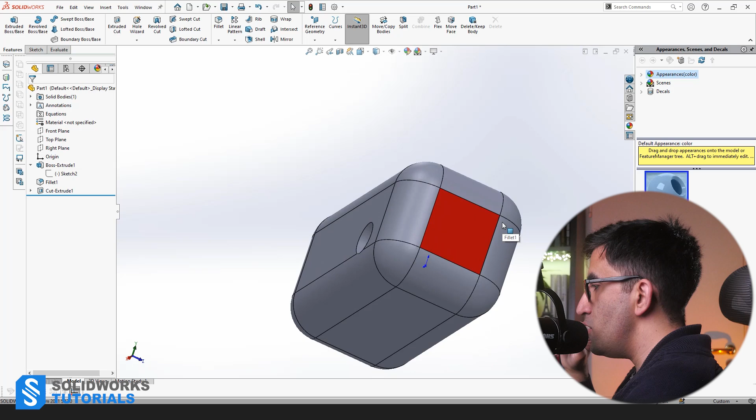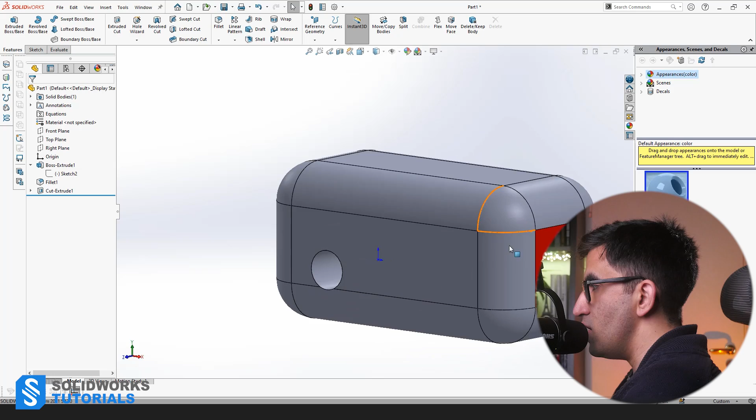All right, so we want to pick it up where we left off. In this video you might notice my navigation is much smoother, because I'm using a 3Dconnexion SpaceMouse Enterprise. I'm trying to get acquainted with this device, understand its pros and cons, so I can make a review later in a different video. Don't worry if your rotation isn't as smooth — you can still work with your regular mouse. This is how I rotate with my normal mouse, and this is how I rotate with my space mouse.

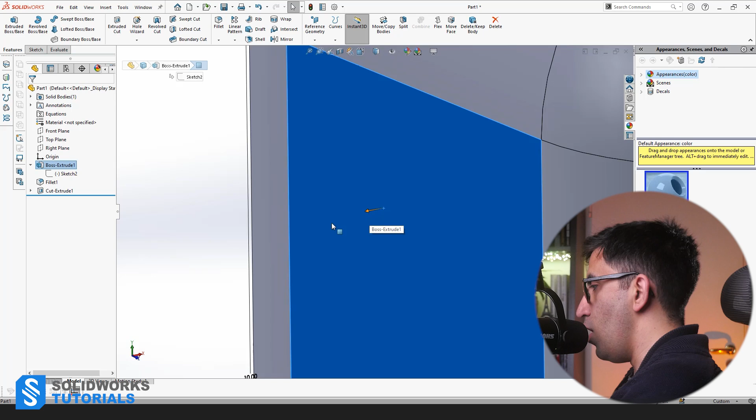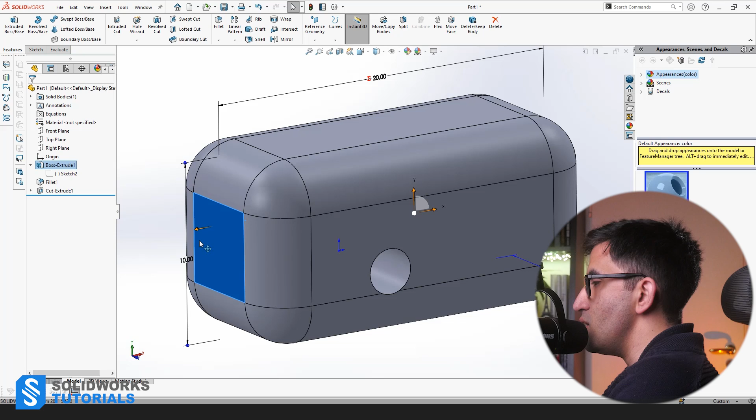Okay, this is what we made last time in episode 2, and I want to make you aware of one very important factor: fully defining your sketch and objects in general. If I select one of these faces, let's say the red one, I'll notice this arrow normal to the surface — it usually pops up as orange in later versions of SolidWorks, though all colors are customizable. If I drag that, you see the cube doesn't change in dimension, it just moves, while the through-all hole stays where it is. If you don't know why that is, there's no point trying to learn more complicated modeling, because this is the ABCs you need to understand to thrive in SolidWorks.

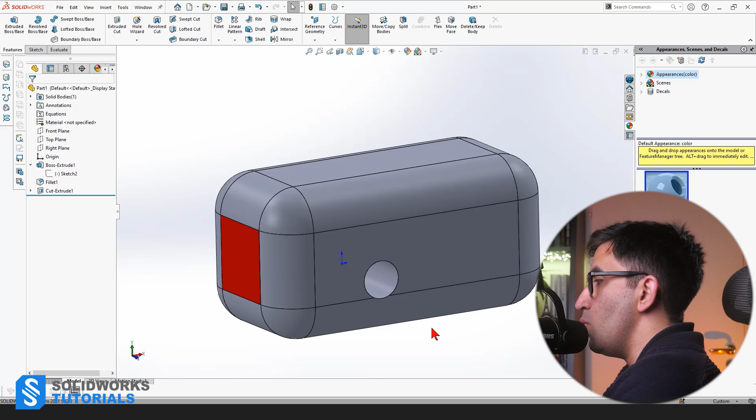All right, let me tell you why. The reason the body of the cube can move but the hole is fixed is because the base sketch used to create the hole is fully defined, while the base sketch used to create the body of the cube is underdefined. Let me show you. I'm going back to the design tree and covering all 3 features used to make this cube with the hole. We have Boss Extrude.

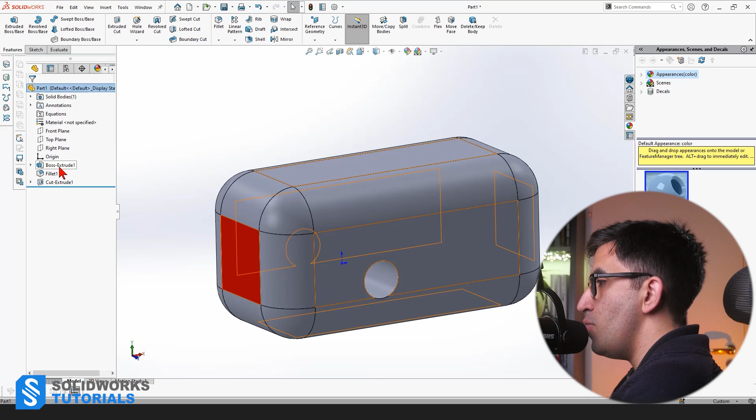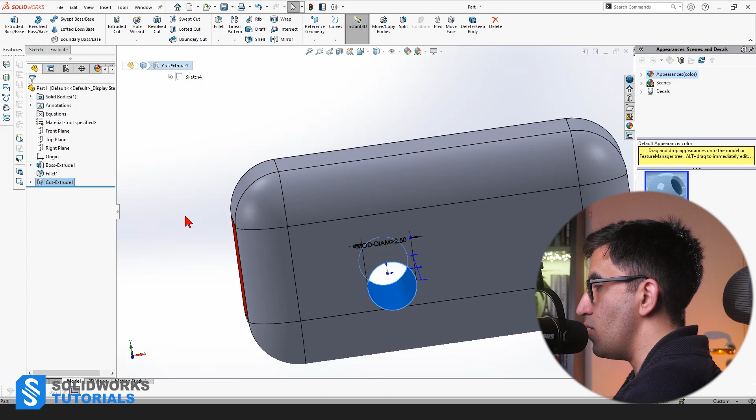I just clicked on it one time and you see this is the body of the cube. We have used Fillet, which has rounded the outer edges of the cube - you see it highlighted in blue. And we have Extruded Cut,

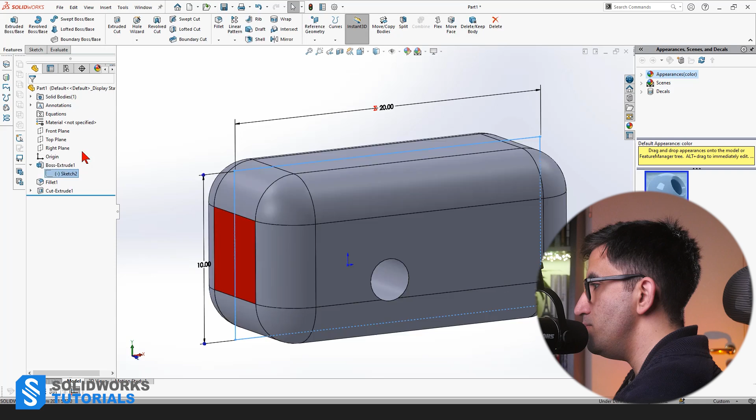which we used to create the through hole in SolidWorks. All right, let's just open the first combo by clicking on this arrow over here, and we see the base sketch we used for the cube, sketch number 2. One click on it, the pop-up menu appears here, and I can select edit sketch from this menu, and it brings me back to the base sketch.

We see that it's 20 by 10. Ignore this equation symbol here, I was just playing around.

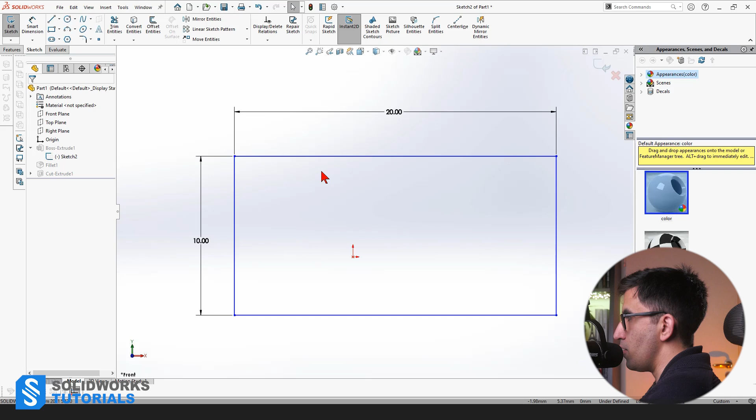All right, so we see the color of our sketch is in blue. Blue is a color-coded definition of an under-defined sketch, which means your sketch is not 100% defined and there are variable solutions to this rectangle. So what dimensions are needed usually to define a rectangle? You need only 2 - one height and one width. A 2D rectangle does not need more than 2 dimensions to be defined.

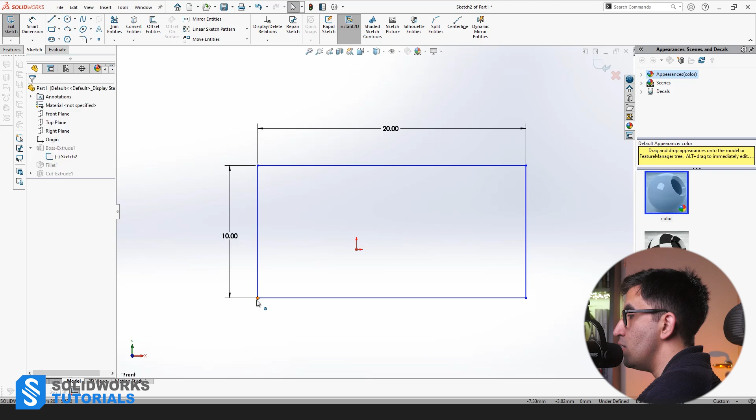However, that only defines the geometry and the size of your rectangle. It does not define its location, the exact coordinates of each corner, right? Because this cube, for all we care, could be 10 by 20, but it could be here, or it could be here. That's why it is still in blue, and that's why it's not fully defined.

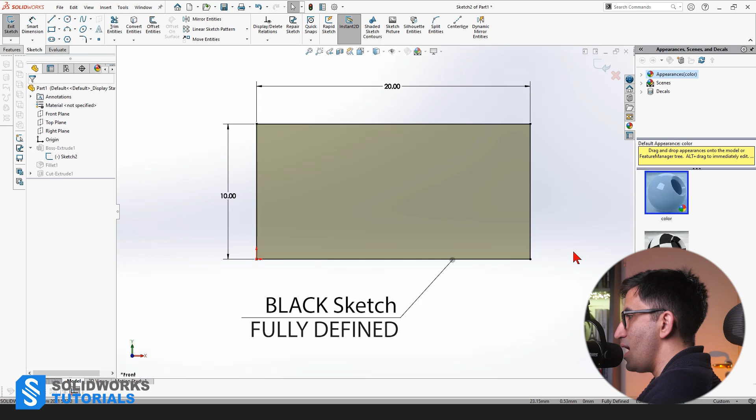So let me repeat that. When you start learning SolidWorks as beginners, you don't want to proceed to create a 3D model before you have fully defined your 2D sketch. Do that and you are risking leaving lots of gaps in your knowledge. You're gonna learn SolidWorks with a lot of cavities and flaws in your base fundamentals, and later on you're gonna face lots of complicated issues that all root from not fully defining your sketch.

Later on, when you reach the pro level, fine, you don't really need to fully define it all the time, but now you should. All right, having said that, there are different ways to fully define your sketch, and these ways are absolutely essential. It's not optional, it's not like based on your taste and personality - oh, I'm going to use this way to fully define it, oh, I'm going to use that.

No, there are 2 main ways to fully define your sketch, and it all goes down to your design intent that decides which one of these 2 ways to use to fully define your sketch. And I want to review both these ways in this video. Okay, so let me Control Z to go one step back to where my sketch was only underdefined and do it again. I told you if I drag this on a fixed point, which is the coordinate system is always a fixed point, the origin, the whole thing goes fully defined.

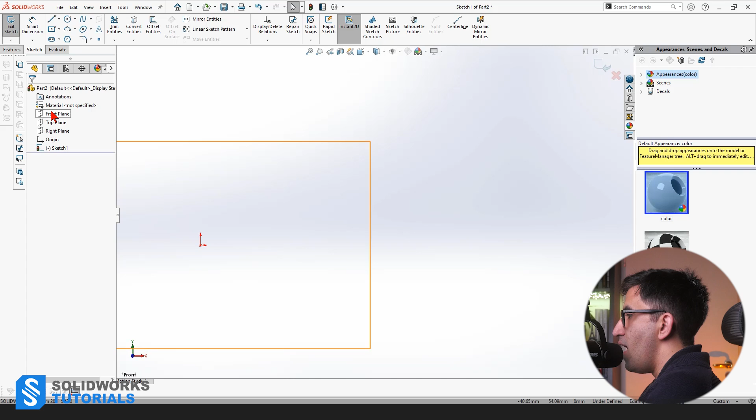So let's just say we're gonna have a sheet, a square of 100 by 100. By the way, guys, I'm using something called mouse gestures - that's why I can quickly turn my mouse into smart dimensions or turn it into circle or turn it into rectangle. Don't be confused and forget that, it's not the point here. At some point I will cover that for you, or if you're in a rush, go on my website and learn that already. But this is not the point.

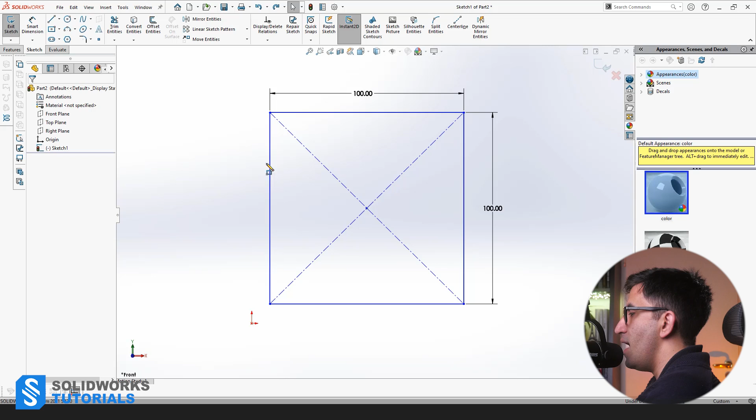Stay focused on the design intent. We are talking about the design intent. We have a sheet of 100 by 100 and the idea is to have a circle exactly in the middle, in the center of the sheet, with a diameter of 25. So I'll assign a diameter of 25 to this circle. What are my options to place it exactly on the center?

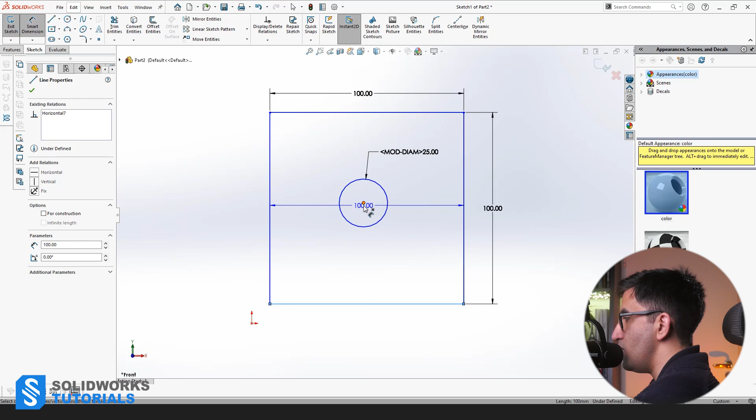Option number 1 is to keep using smart dimension, and I select the edge of my square, then I select the center. Obviously that mode turns into distance and I just assign 50 from this side, and again, from this side, I'll assign 50.

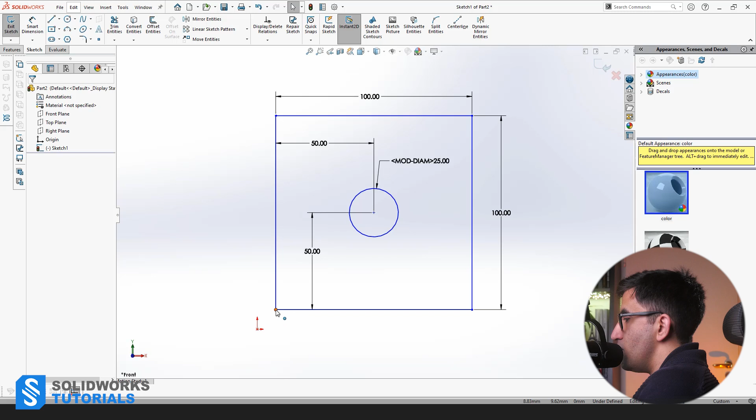So now our circle is exactly in the center of our sheet. We can agree on that, right? Because it's 50 from the left, 50 from the bottom, and the sheet is 100 by 100. That's why it's in the middle. And I'm gonna place it on the origin so everything goes fully defined in black.

Fine, everything is good. But later on, there is a new iteration needed, and we decided to, just like in the previous video, turn one of these dimensions into 200. Now, since the objective was to have the circle on the center of the sheet, we're gonna have to go back and adjust this dimension as well. We're gonna have to change this into 100 to keep pushing it in the middle.

Now, again, there is a new iteration, that's fine. But let's just say there's gonna be tons of more iterations. Let's just say 3 or 4. Every time you change these two, you're gonna have to go back and change these dimensions for the circle. And that is why for this design intent, which is having the circle on the center of the sheet, using smart dimensions to fully define your sketch is not the right choice.

That is why we turn into the second option to fully define our sketch apart from the smart dimension, and that is using sketch relations. Sketch relations is a very deep topic, is really fundamental, and it is about 10 minutes if I want to explain it in detail perfectly.

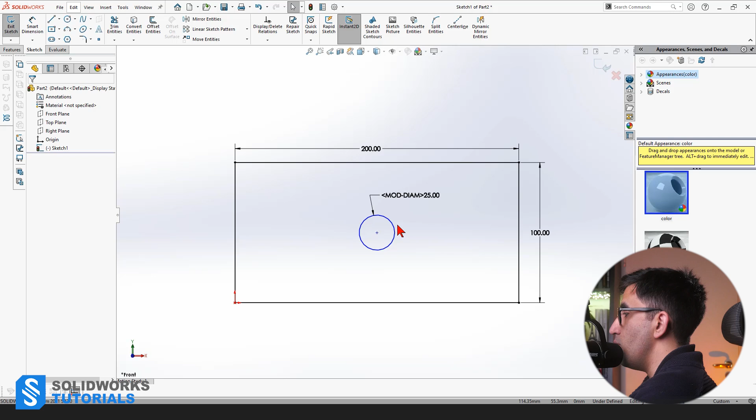Good. I just deleted the 2 smart dimensions, and my circle just went from fully defined, which was in black, back to being underdefined, which is blue. Now, I have to use sketch relations to set it, to fix it on the center of the sheet, right? So how do I do that?

First, I right click on this side and click on select midpoint. Then I'm gonna hold Control key on my keyboard, and I'm going to select the center of the circle while still holding the Control key. Now at this point, I let go of the Control key. Look at here. The feature manager switched to property manager, and we see the selected entities are point 1 and point 15, which are these 2 points, ready to be assigned a new sketch relations to.

What we have here, I want these 2 points obviously to be in a vertical relation, and SolidWorks has guessed it correctly. As you see, vertical is written in bold, while the other 3 options are written regular. So one click on vertical makes these 2 points to be in a vertical relations at all times. Look, I cannot move this to left or right, only up and down.

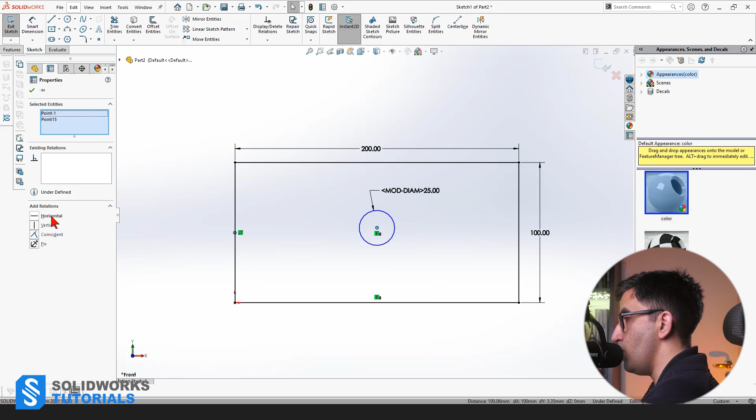Now, if I do this one more time from the side, right click, midpoint, Control key, center, let go of the Control key, and this time horizontal is bold, select. Now, since this point has to be in the horizontal relation with the midpoint of this edge and the vertical relation with the midpoint of this side, it has no option but to be fully defined and black.

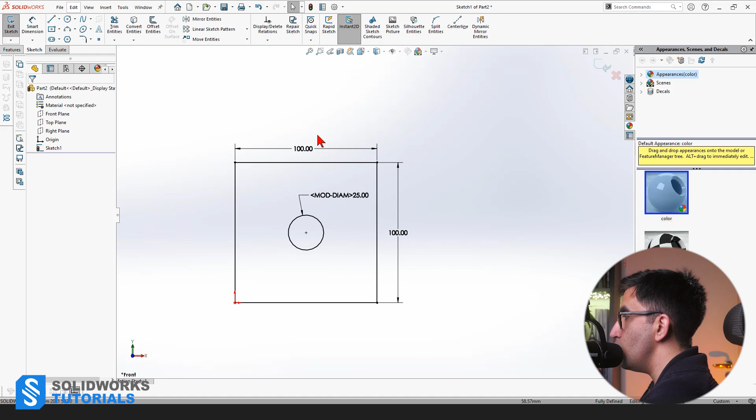Now, if I change this to whatever dimension, 100, the circle moves with them. Why? Because the midpoint adjusts itself dynamically and the center of the circle goes with it. So for this design intent, using sketch relation is a much better option than using smart dimensions. And these small details, knowing when to use what, makes the difference between a professional and efficient SolidWorks user and a normal SolidWorks user who has learned these subjects randomly here and there, or even haven't learned them at all.

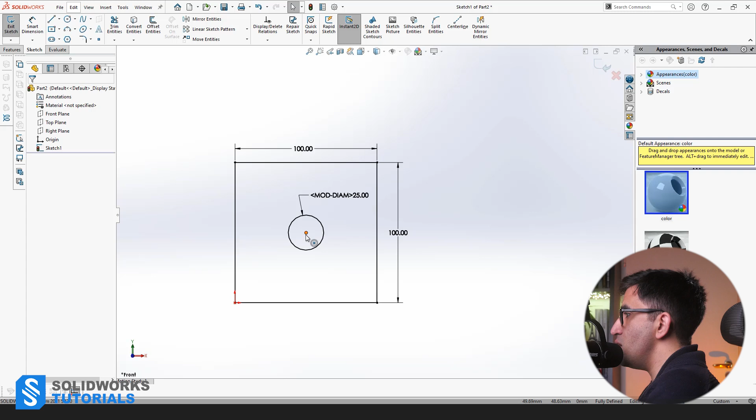Now, enough with the design intent, let's switch back to our example. I told you we want to have this cube fully defined. One way would be to just drag and drop this point on the origin, makes everything go black. But this is not what I would recommend to you, because that would be a cardinal sin in the world of SolidWorks by my standards. And I will tell you why.

If I select, let's just do this, let's just do it the wrong way, continue, and I will explain what downsides and what cons comes with fully defining your rectangle this way. That is putting one corner on the origin and pick the lazy way. I'm going to rebuild this sketch.

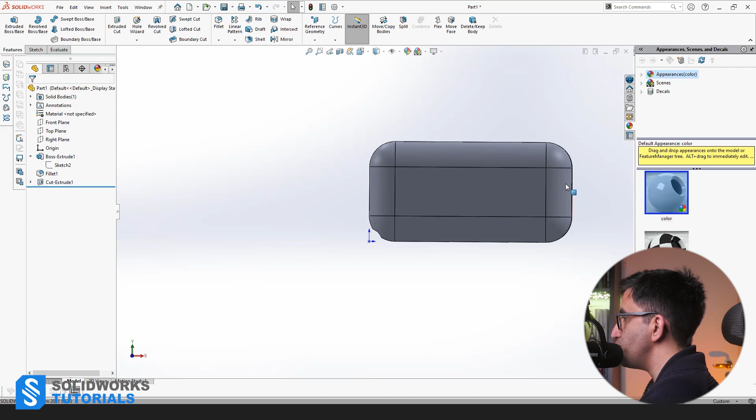The issue that this way of fully defining your rectangle brings with it is having the three default planes that we had on the design tree over here: front plane, right plane, and top plane on its sides. Look, the front plane, which we see is this one, is centered in the middle of my component, which is the ideal way.

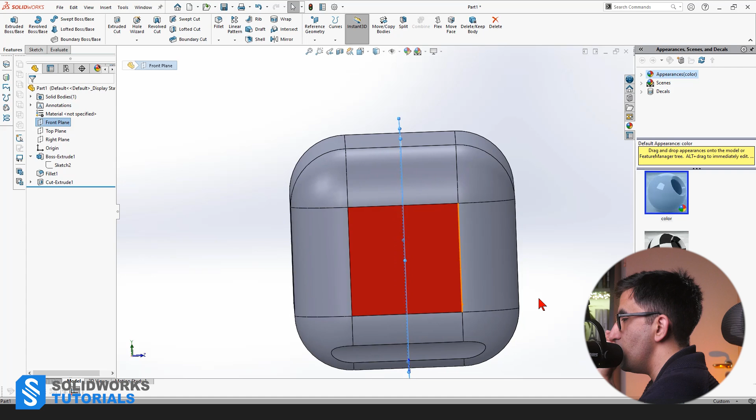The top plane, however, is on one side, and the right plane is also on another side. Having your planes on a flat surface on the side of your cube is like wearing a hat on top of a hat. It's a pure waste of your resource, a pure waste of your planes. Why?

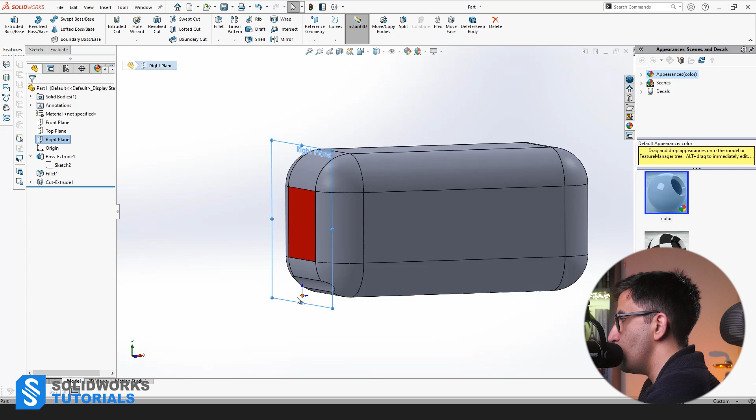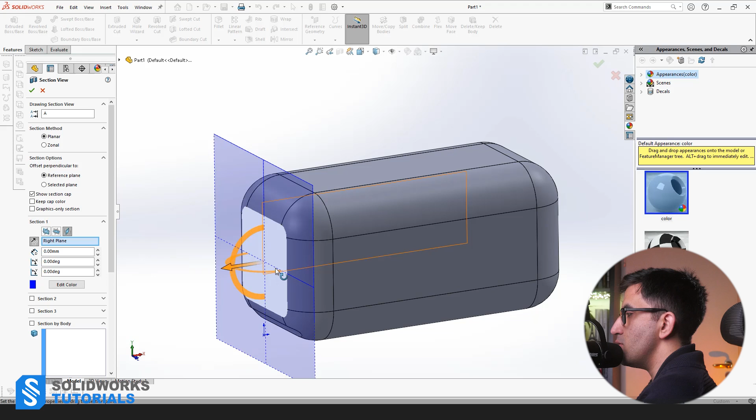A lot of times when you're modeling, you need to mirror stuff. You need to have a cross section, you want to look at your cross section, so you need a plane in the center of your component. If you fully define your sketch that way, you put at least two of your three default planes out of the equation. They're basically useless. I cannot use this right plane to look at my cross section, because this plane doesn't cut anything in half. It just slides over the surface of the cube. It doesn't add any value to your model. Later on, if I wanted to add something on this surface and mirror it on the other one, I would need a plane in the middle to do this mirroring procedure.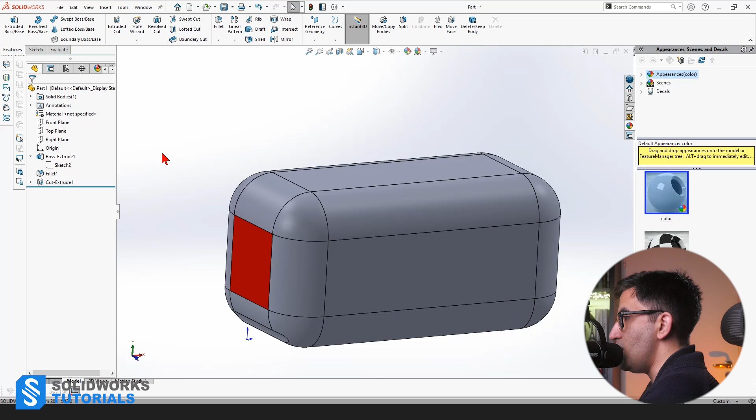So what can I do to fix this? I'll go back to the base sketch of my cube, which you see exposed on the design tree here—it was sketch 2. One click on it, pop-up appears, edit sketch. I'm going to select this point, which was set on the origin. Once I do that, the feature manager gives its turn to the property manager, and here I can adjust the existing relations, which was coincident. That point and the origin are in a coincident sketch relation, and I press delete on my keyboard to get rid of that. The whole sketch goes to the state of underdefined.

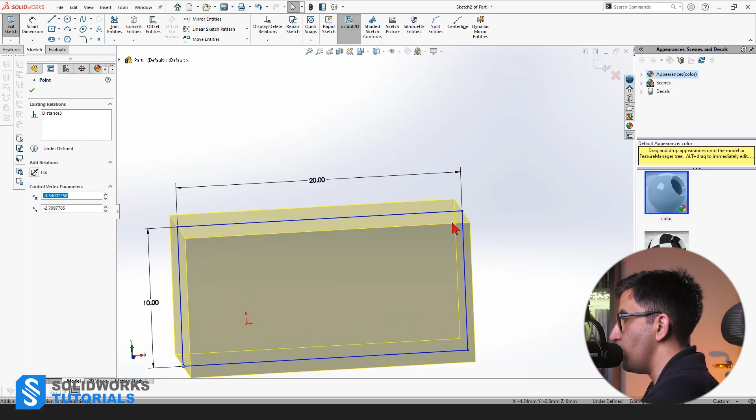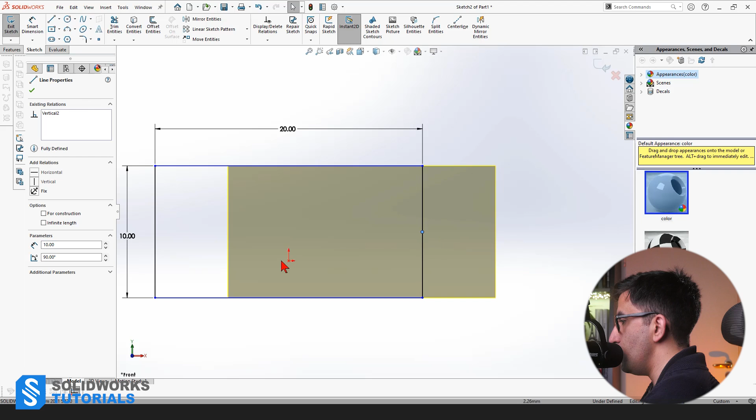I'm going to show you how you should be fully defining your rectangle ideally. Just like in the previous example: right click, select midpoint, hold control, select the origin, make it vertical. Again, right click, midpoint, control, origin, horizontal. Now we have our sketch fully defined and the origin is on the center of your rectangle.

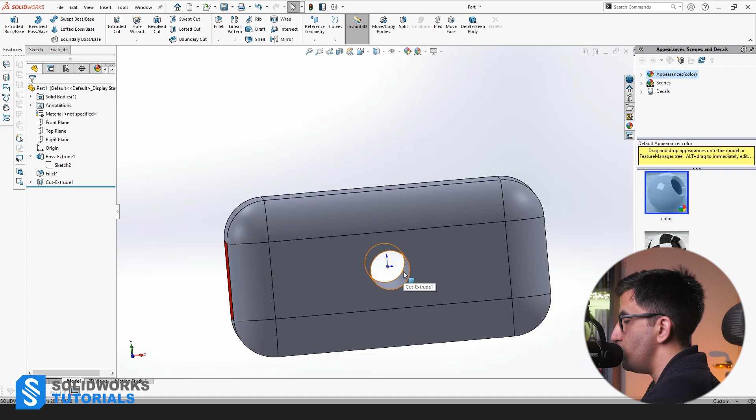Let's rebuild and check the results. First of all, our hole, which was set on the origin, is automatically in the right place. So we had that fixed. That's one side. Now our front plane was already on the center of our object, which was fine. Our top plane is now cutting our object in half as well, and so is the right plane. So we have 3 out of 3 planes cutting our cube in half.

In case we need to do any mirroring, in case we need to look at the cross section from different angles, we now have 3 options. We don't need to go the extra mile and create custom planes, place them in the center, and do that stuff. We are now two steps ahead of those who didn't fully define their sketch this way and now have to create new planes, which takes longer, increases the risk of making a mistake, and slows down their PC as their design tree keeps growing unnecessarily. You don't want to keep adding features here—it only confuses everyone, including yourself. You want to keep it short, concise, and efficient. This is the most efficient way of fully defining a rectangle.

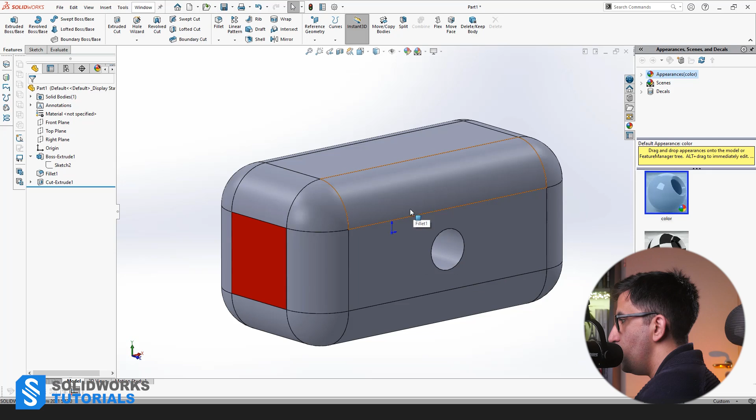All right, I told you in the intro that in this video we also want to cover Revolved Boss or Base. Let's do that and build on top of this. I want to turn this into a hammer, something like Thor has—I don't remember its name, but it has a name, his hammer.

And if you are a fan of comics, you can maybe type its name in the comment section below.

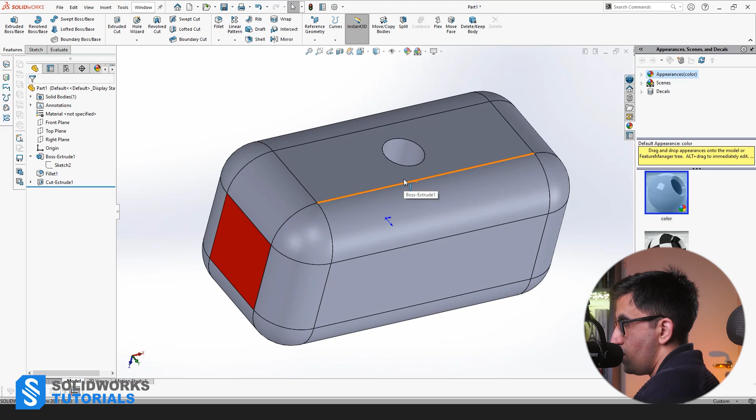I want to use this hole as a placeholder for the handle of this hammer. So how do we do that? Obviously, one way would be, and in this case the right way, would be to select this edge, turn it into a sketch, and extrude it all the way down to create this handle, which is a cylinder. But since I am going to use this tool, which is Revolved Boss, for the sake of this example, I'm going to take the suboptimal way just to show you and focus on the purpose of this tool.

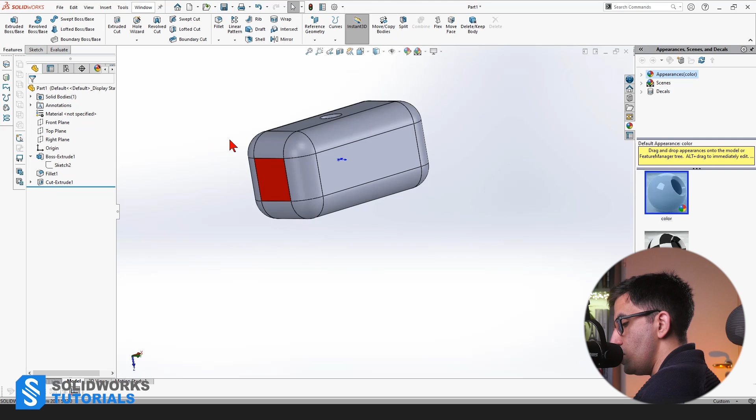I'm sorry, I just clicked a little bit ahead. Normal to fit. All right, I'm working with the 3Dconnexion on my left hand, trying to get acquainted to the shortcut. So first of all, I would like to look at the cross section of my hammer so I can see the hole in the center.

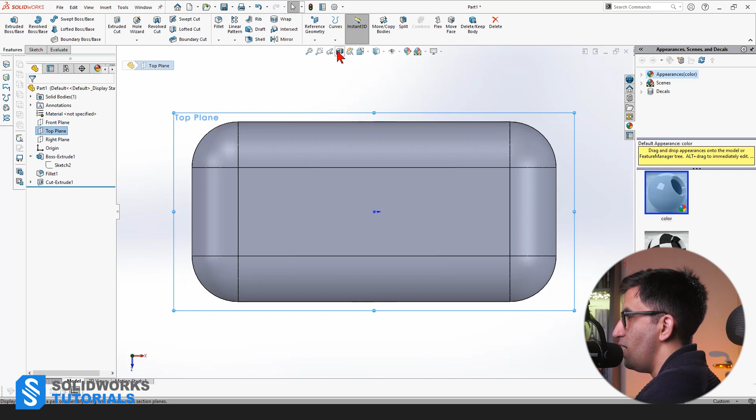And that is exactly why top plane is in the right place right now. See, I can select top plane and click on section view over here, and voila, we have it.

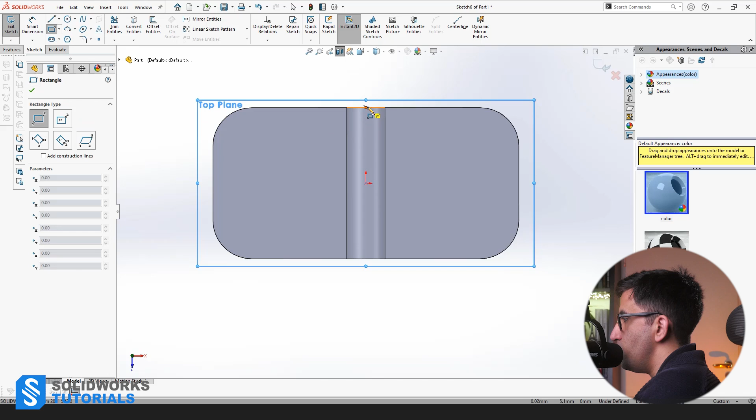All right, again, I want to select top view, activate sketch, and go to rectangle and draw a rectangle from the center, from the midpoint that you see over here. One click, and then I'm going to go all the way down. I don't know how long I wanted the handle to be, but the diameter is fixed.

Smart dimension, 1.25, it's fine. It's almost fully black except this last edge over here, as you see, because the height of the handle is not fully defined.

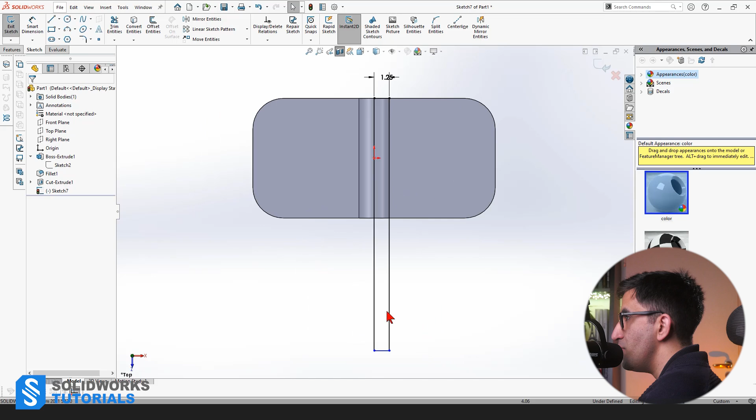So we want to do that right now, and that is using Smart Dimension again, to assign a height to it. If it's 21, I want it to go to 31. That is fine. Now we have a fully defined sketch, and I want to rotate it along its center axis.

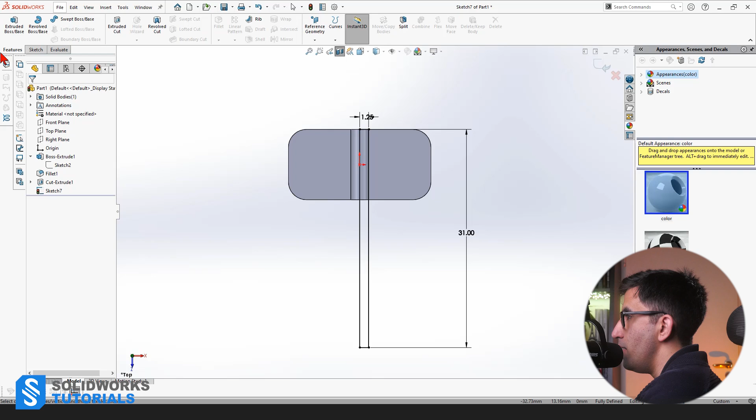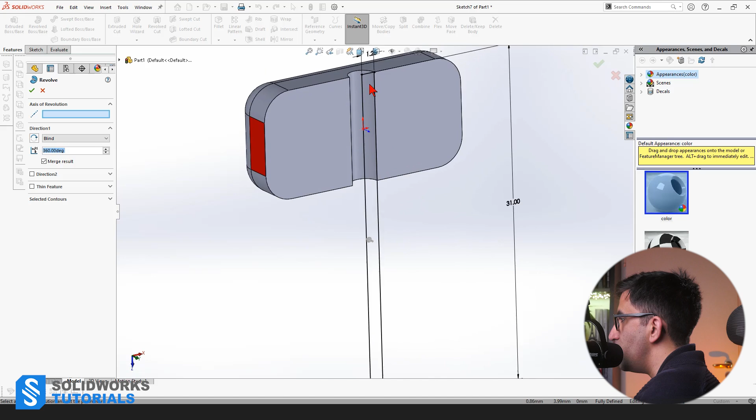Or this left edge. I go to the Features tab. No need to rebuild the sketch, although I can, but in case of Revolve, you can keep it in the sketch mode, no problem. Click on Revolved Boss or Base, and all it needs from you is to select an axis of rotation. So in this case, my axis of rotation will be this edge. Just one click on it, and this is the preview.

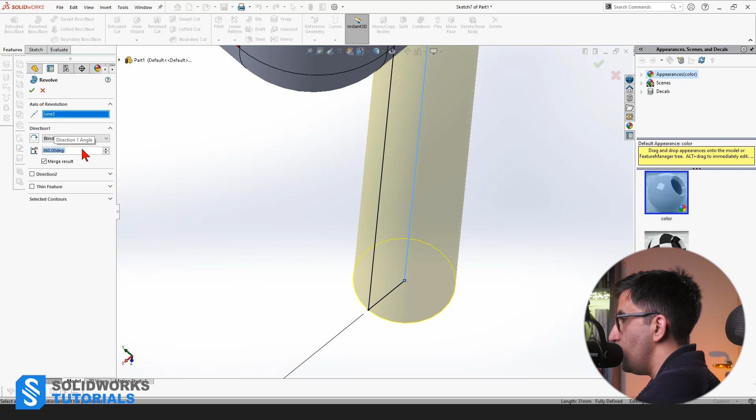If you don't know what's happening, allow me to change direction 1 from 360 degrees to 270 degrees so you see what's happening. Look, this is now 3/4. I'm going to leave it at this angle and keep adding to the angle, see what happens. It's rotating this rectangle along its axis, and I keep adding to it until it goes to 360. It cannot go more than 360, by the way. Like this, and click OK.

Now you might be wondering why you still get half a circle. A lot of people forget that when they started drawing this handle, they activated the section view over here. It is still active. If you want to see the full thing, just deactivate it. Now this is your hammer, and that was Revolved Boss, including Extruded Boss.